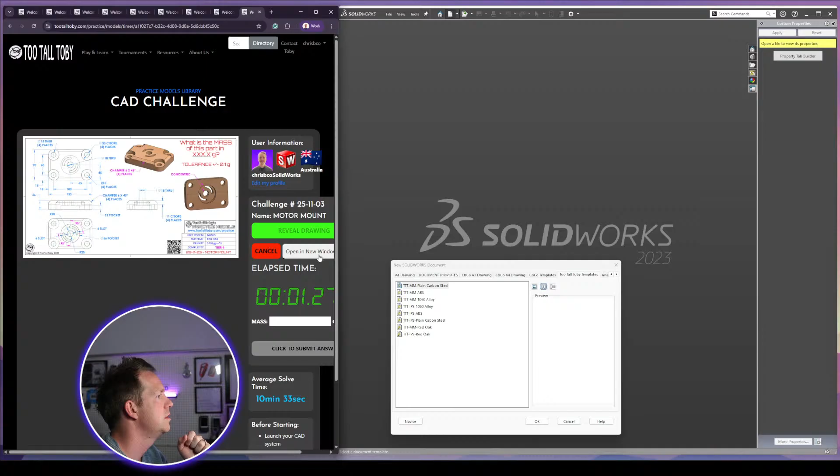All right, we'll click to begin, and I'll just have to set up my screen a little bit. All right, so here is the model. Give you a few seconds to take a screenshot if you're wanting to have a go. Red oak, millimeters, tier 4.

All right, closing that now or repositioning it. And I'll get my red oak millimeters file open. Hello, Ashishi, welcome. And let me restart the timer, and then we'll get started. Cancel, reveal, open new window, let's go.

Okay, so it's symmetric apart from that section in the middle. So as Ace has taught me, we should just do a quarter of the model. So I'm going to do half the height, which is 45, and half the width, which is 65. I'm going to do that outside radius right now. It's going to save me some time. I'm also going to put the circle in the middle, which is 18 through all.

Trim. I'm not going to trim those sections. I'm just going to extrude straight up as is. I think those are the only sketches I'm going to put in. I'm going to extrude up 26 with this contour.

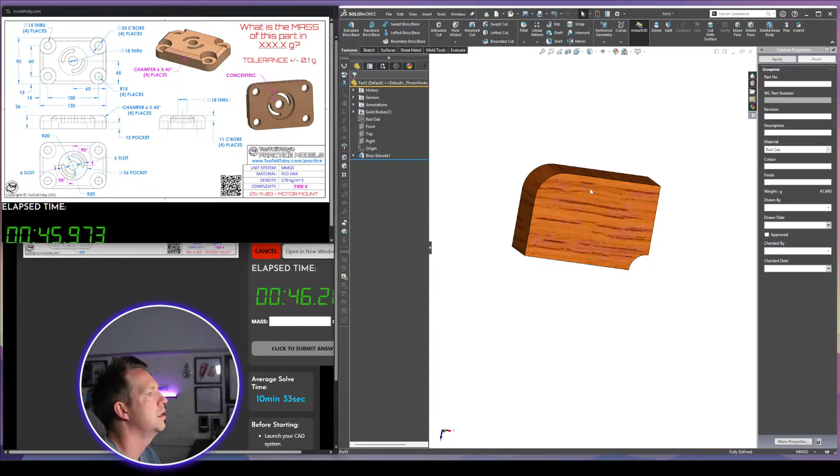I'm going to then grab on this top face a circle. I'm going to cut down, and this one I'm going to cut down. And let me just check, do I have it in the right position? Yes, it looks like. Okay, that's going to cut down to 11 millimeters.

I should have actually done this with a counterbore hole wizard, but I don't have that set up, so we'll just do it this way. It's actually a bigger circle, it's 33, so I'll have to fix that up in a second. The hole is 15, so that's going to go through all.

Let me just fix this one here. Put that dimension in, 33. Okay, and we do have the chamfer on the top. The chamfer is 6 by 45. So put that in very quickly.

2 edges. Okay, there's a hole on the bottom. That hole on the bottom is, looking for the dimension, 56. And that comes up 12 millimeters.

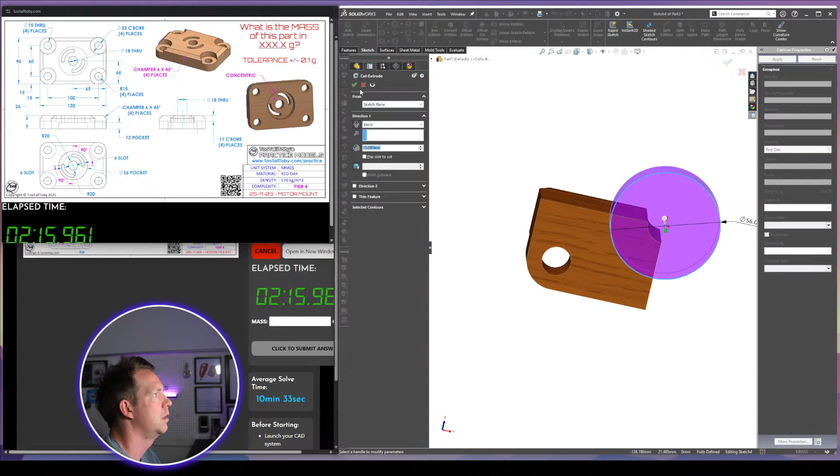All right, now it's time to pattern. So I'm going to grab the 2 faces, grab the body, merge, and then we've just got our slot on the top to do. Now this slot we can do with a 3-point arc slot or a center point arc slot, probably quicker. Center point, arc, like that.

Now I want to change the dimensions. So the center point of this is 20. The width of the slot is 6. The slot itself is 90.

If I get this to vertical, center point, doesn't want to do it. I'll put a construction line there, make that vertical for construction, and I'll do a circular pattern on this.

Cut through all. All right, and if we're done, 119.5. That's it.

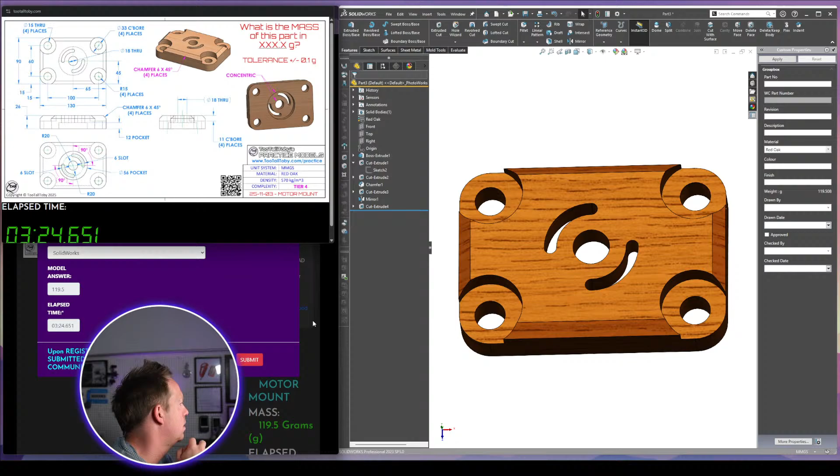I know you could do an Ivan exploit on that one. Didn't worry about it. Yeah, we could probably do a little bit quicker. I think the number of features is about right. We'll submit the time. Ace, do an Ivan exploit and do those arc slots 45 degrees in the quarter. Yeah, I guess you could do that. What would happen? Yeah, I wonder. I think it would take too long to figure out where exactly to put the slot. You know, just in case. I know sometimes it's allowed doing the Ivan exploits, but for the speed, for the more the accuracy, I'd rather do it the right way and practice that. Just think it's more likely to be beneficial in the future.

I'm just going to get a screenshot and save the file.

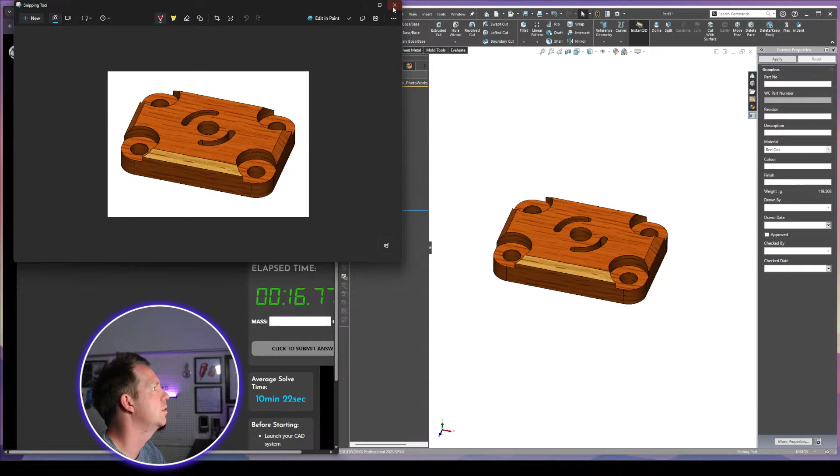I definitely like the model though. I got a little bit stuck with that hole at the start, but I did see the counterbore quickly. I think that's one way of doing it quicker.

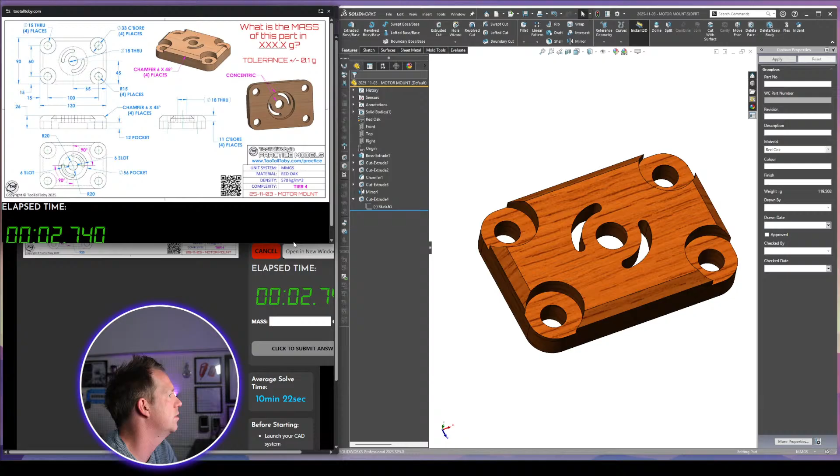I want to do a speed run of this one very quickly because I think we can do it a little bit quicker. And what that looks like is rolling back to here, putting the chamfer here. So just select one edge for the chamfer, and then on this face, doing our counterbore hole wizard,

where it is custom size 30. No, it is 15 by 33 by 11. No head clearance. Position is at the center point.

Right, so that'll be much quicker than these next two. Delete that. Delete that. This one here. Could I put that sketch in the bottom? I think so. So put that sketch in here.

56. Put that in there. I have to select an extra contour here, but it'll make this cut extrude quicker because I can just go this one, select this contour, and come up. Yep, 12.

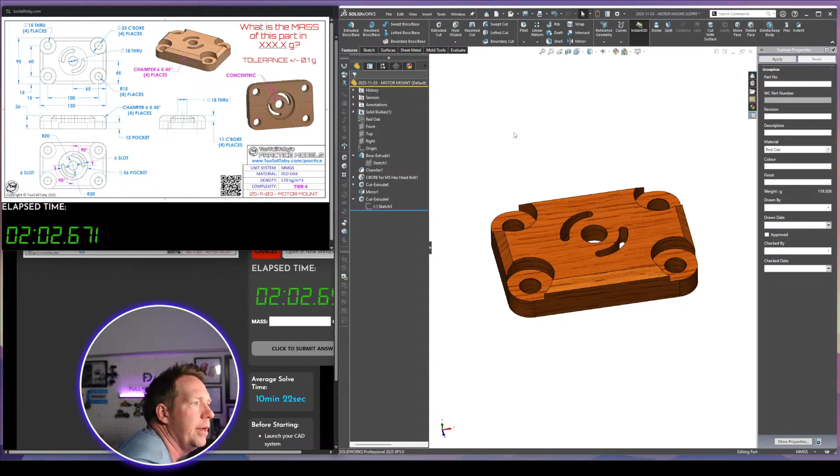Okay. Let's give it a quick go. So numbers, I'm just going to memorize some of these very quickly. 45, 65, 15, 56, 18.

They were coming up. 26, 6 chamfer, counterbore's done. Do the cut up 12, mirror, mirror, and then the slots 20 by 6 by 90. Okay. Start a new file. 119.5 is the answer we're looking for.

This will be the only one we'll do 2 runs for tonight. All right, cancel, reveal, and let's go.

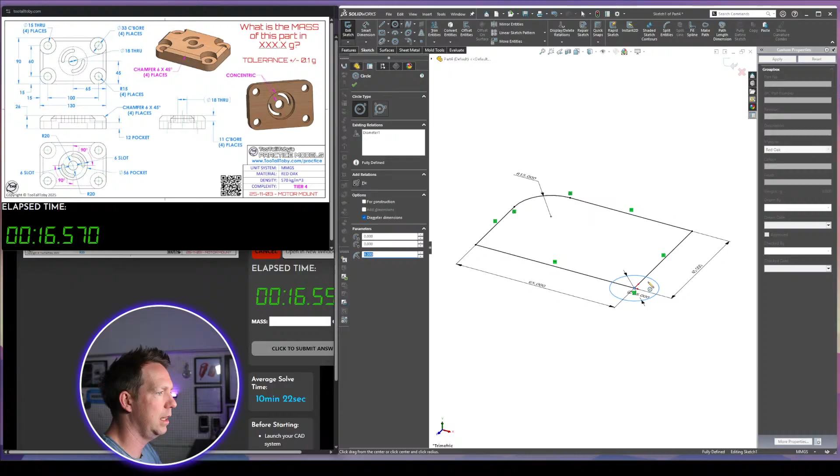Top. So going 45 by 65, radius of 15. Haven't done my 2 sketches yet. 18, 56. Now extrude. We're going up

26. It's slow on the selection. It's okay. Chamfer here of 6. Hole wizard here. Just want to get the right spot.

All the dimensions should be good. Yep. Grab this hole here. This is going to go up 12. This section.

And then we're mirror, mirror. Body. And then slot here. So we've got center point arc slot coming out 20. Out 6. We just have to get that to 90.

And we can do an Ivan exploit on this one. Just want to do 2. Cut through all. 119.5. There we go.

Did the Ivan exploit? Yes, that's a lot quicker, I'd say. Thank you.

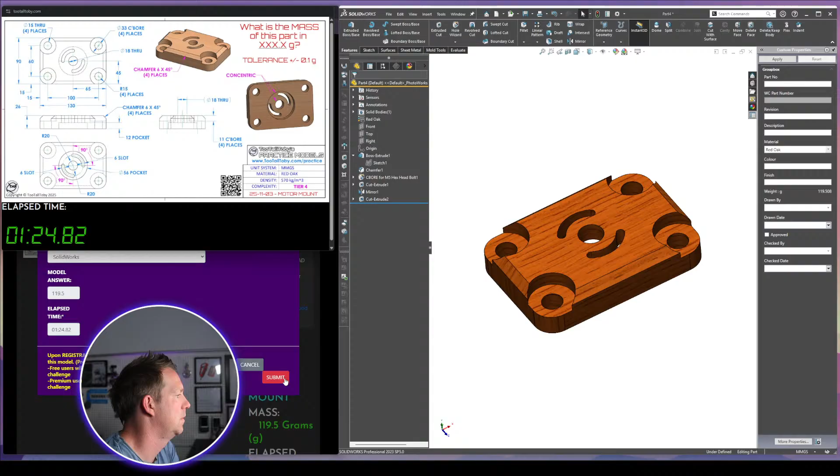Submit that one. 124. And where's that going to put us? Number 1. Sweet, all right, good warm up.

Now we can do the tier 7. Okay, that is the first one done. Tier 7 model. All right, this is going to be a big challenge. I saw this one.

I saw Adse and Ricardo do this, and they both did it in different ways. And the fill pattern is, I think, very difficult to get right.

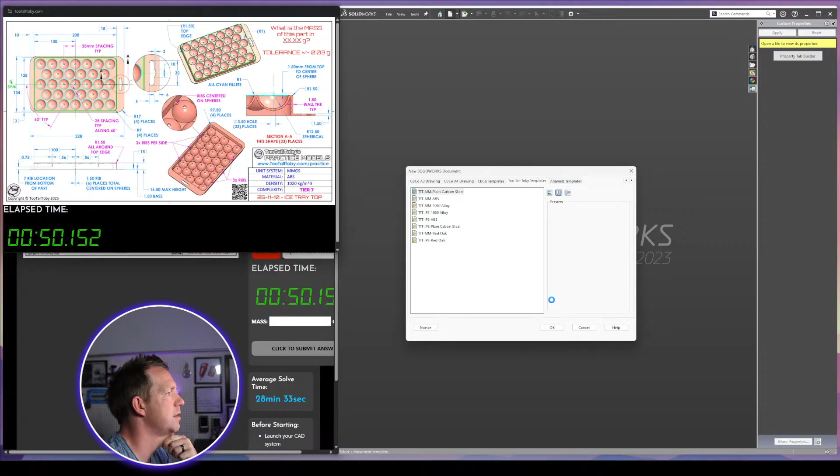So it's an ABS model, and thankfully in millimeters. Do the cut after the fill pattern. I take it you mean the hole cut, the little holes that go through them. Very complicated.

Can we do a quarter? Like, I would have looked at this immediately and gone, can we do a quarter of this? But because of the offset on one side, this 18 here, and this 10, that makes it really challenging.

And would I have done fill pattern? I think, oh, I know one of the runners did not do a fill pattern. They just did a linear feature pattern, which was smart. All right, that's ace. That sounds good.

Ribs have to go in after the shell. So the main idea with this is that we create the main body, we do all the top shapes, then we shell to remove the material underneath. As you can see, there's a 1.5 mil wall thickness, which is typical. So we want to try and work to that, cut the holes afterwards, but get those kind of dome shapes in the right spot.

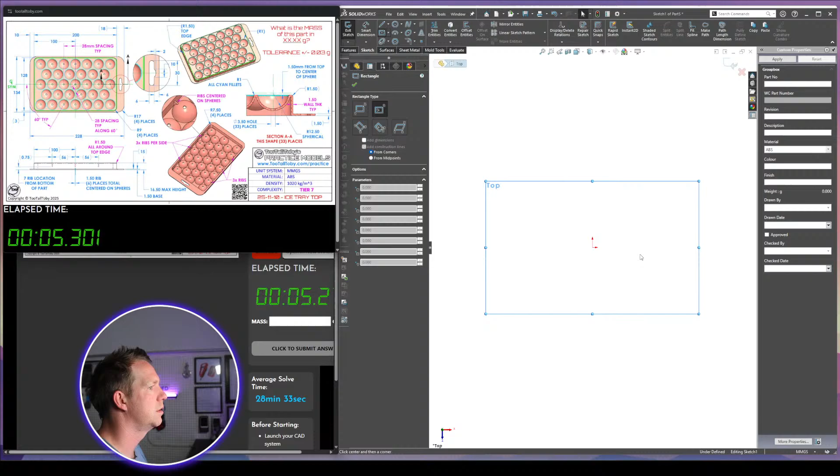Given how complicated this one is, like tier 7, I think it's a better idea to not worry about the symmetry so much and just get the whole thing right, like model the whole thing in one go. So let's do that from the top plane. And I am going to use the center point here, even though it's not the exact center point of the model. I'll explain why in a second.

I'm going to do the first shape, which is 128 times 2 by, oh no, that's the full height, sorry. 200, 128. I'm going to do this shape. And then the radius is at R9.

I'm going to do this part first. Thankfully, there's no draft on these walls. That would make it complicated. I'm just going to extrude up, get the full height. And I'm going to include the bottom, so 16.5, the max height.

And now I want to do that pattern. Now, I'm just looking for a section. So here's one way of doing it. I know that there's a lot of different ways, but we'll try this one. All right, you can see in the section view that the hole starts above.

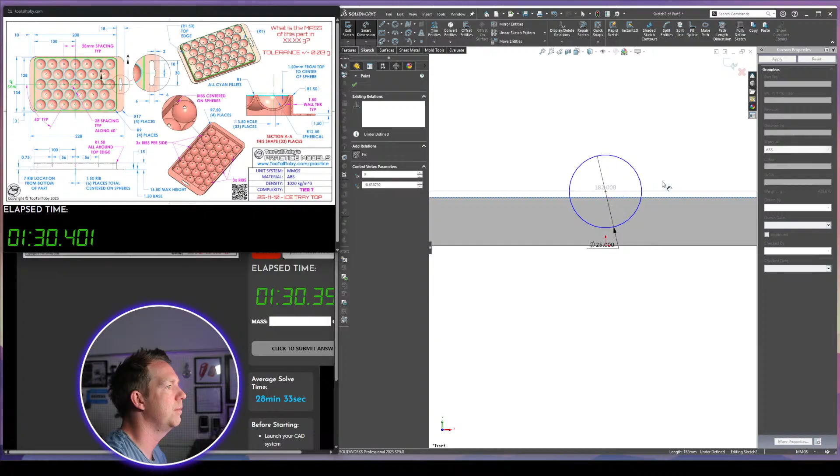All right, now the internal radius is 12.5, so we do 25. And we can also see it's 1 mil from the top, and that obviously it is in front or in line with the origin. Okay, so that's going to be vertical.

Now we put a line through this, just split it, and then we can do a revolve cut. So I'm going to select the midpoint. I'm going to uncheck thin feature, select one of the contours, and go blind. Right, so I've got the hole that I need.

Now I need to do a fill pattern with this. If we can do the spacing right, then it would work pretty quickly. So I can select this feature. Let's see if we can do a fill pattern.

Boundary is here. We need to do the spacing right, which is 28. The angle is 60, yes. And look at that, it's just done it for us.

I don't think we've had to do anything other, like change anything else. The count, 33. 1, 2, 3, 4, 5, 6, 7. 7, 7, 7 is 21, plus 6, 6 is 33. So we've got the right count. We press OK, that shape is done.

Now we can't do that little cut hole until we do the shell. So that'll come next.

Right at this point, we need some fillets, but I believe the fillets can go on after the shell. So we could do our shell.

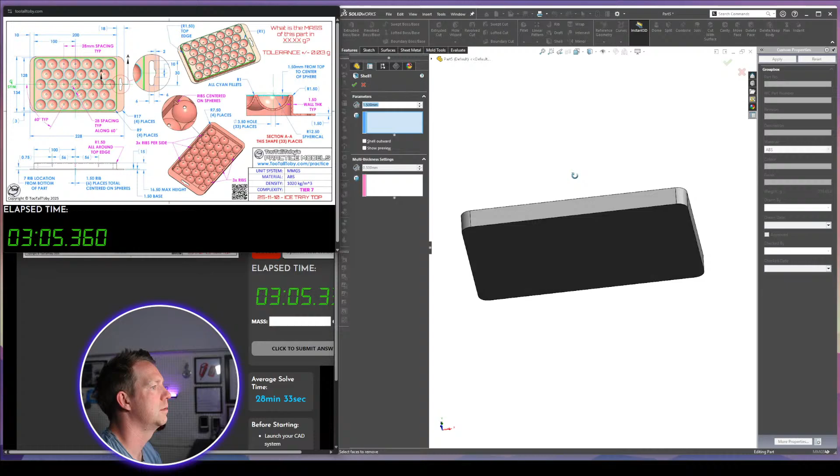1.5 for the shell. We could do our fillets, 1, which is all the top edges. I'm pretty sure there's a 1.5 on the outer edge. The way to do that is do the large radius first, the 1.5, and then do another one, which is 1. It's going to skip the edge that already has a fillet.

And then on the top, we're going to do a through-all cut. The hole size is 3.5, and we're going to go through all.

All right, can we do the same fill pattern with this one? No. Maybe. Don't think it's going to work. No.

So this is the one where it's probably better to do one of the patterns here, and then do the sketch pattern or the feature pattern. I reckon, wonder if we could do it here.

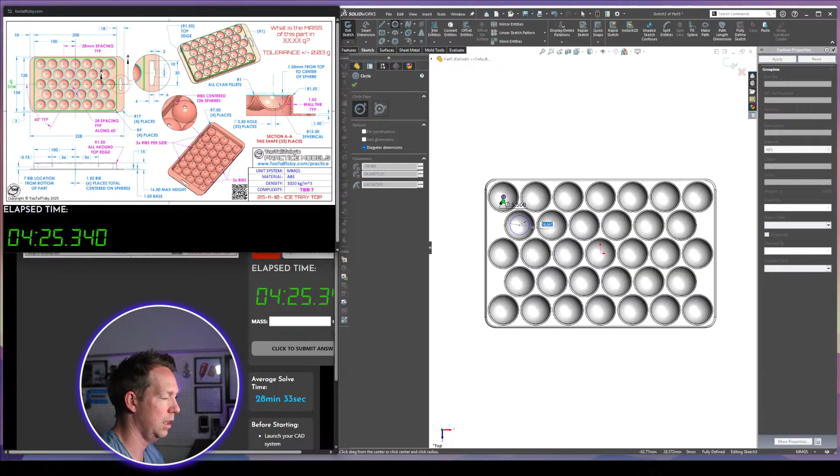In your sketch pattern, 28. It's that last one that's going to bugger things up, but we can get around that. What's the spacing this way? 28, but it's kind of on an angle. So this is the tricky one.

56. No, I'm going to uncheck that dimension. I'm going to bring that back. So that just lets me bring this to the point. And then all I have to do is this one and this one, just make them for construction. And then I'm okay, that's going to cut through all.

All right, so now I've got the hardest part out of the way, I think. So then we're back on the top plane. Now I've got to do the other shape.

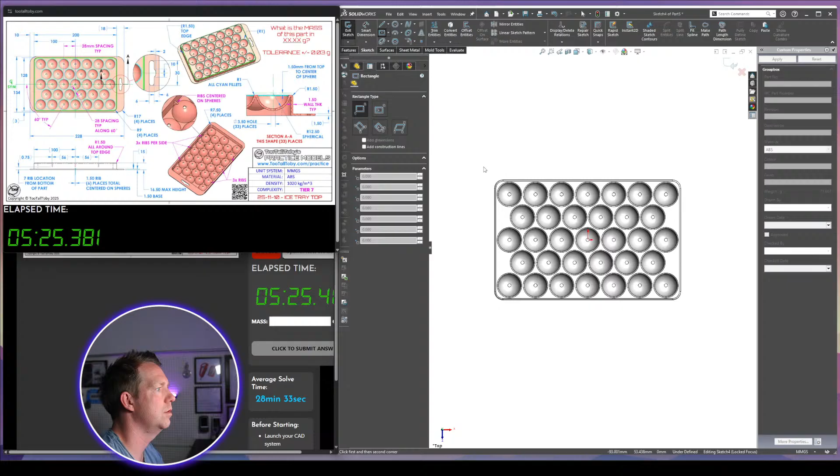So now I'm just going to do a normal rectangle, and I'm going to do the full outside, which is 134 by 228. These ones have a radius, outside radius, 17.

I'm going to grab this one, midpoint, and get that in line. And then I'm just going to get the spacing right on one side. This should be 10. And then on this side, I'm doing my slot.

So I've got a straight slot, which is -- the way it's dimensioned is not very nice -- 6 by 30, with an arc in the middle, which is 10 by 2. Put that in.

So that has a distance between those as 10, and from here to here, 2. And we just need to get that in line with the origin and then the spacing right. And the spacing is 6 from this edge. And what else is missing? This one in line with this.

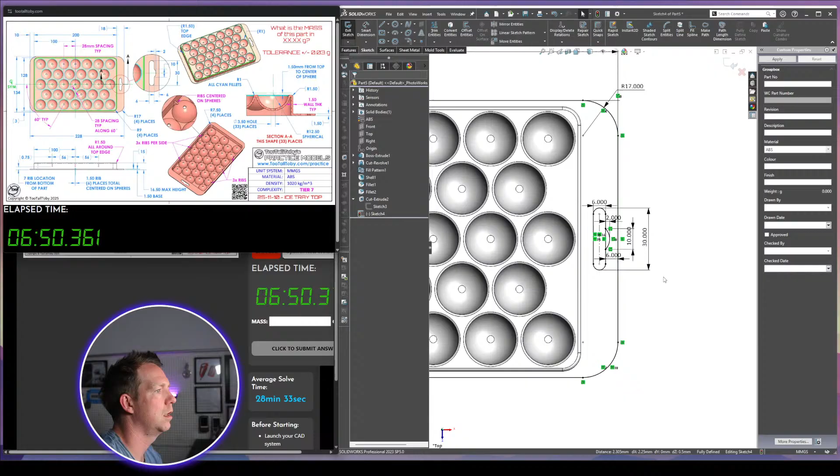Okay, so now we're going to extrude. I'm going to grab this edge, tangent, convert, extrude up 1.5, select this contour, done. And this would be the final check.

I've got to do the ribs. So rib on the bottom face. Ribs are centered, 3 ribs per side. Ribs go down 7 millimeters, 7 from the bottom, 56 by 56 spacing.

How wide are the ribs? Doesn't really say. I'm just going to put this in, and there's going to be another one that's here.

I should just do a linear pattern for this. So do 56 one way, mirror that one, mirror all 3.

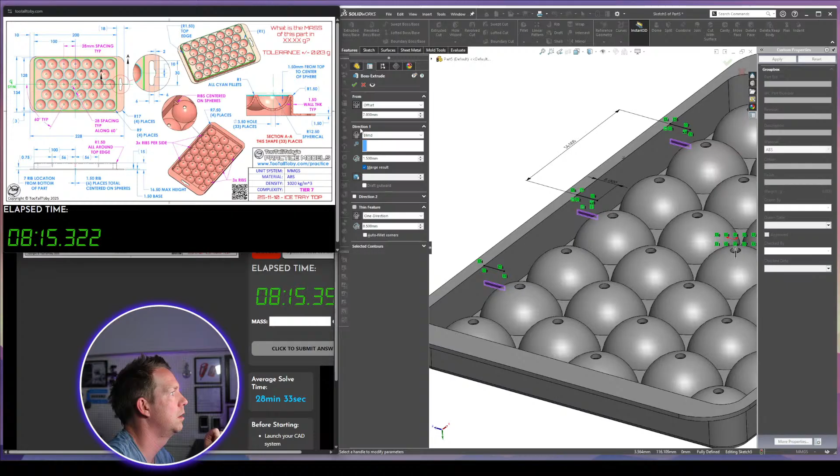Instead of using a rib feature, I would probably -- they're going to be offset from the bottom 7 millimeters. So I'm going to go offset 7. I'm going to go up to body, and the ribs are 1.5 mid-plane.

Okay, that should be it. 78.84. There we go. First time.

Not bad. What did you reckon I'd say? No move face.

Pretty smooth workflow. Little mistake on trying to do the holes with a fill pattern, but otherwise good.

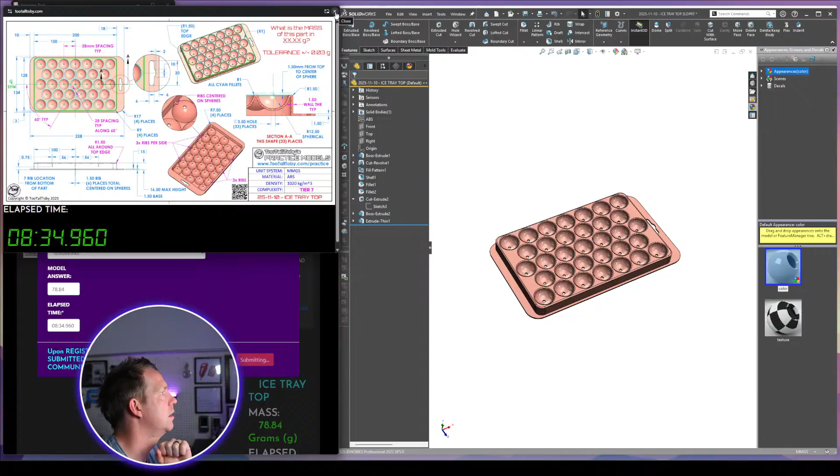I wonder if there's been any quicker than that. We will find out. Submit. Average time 28 minutes. Yeah, it's pretty hard.

That was a lot of fun. Good suggestion, okay the poll is open. No one else is voting. If you can see the poll, here 4, 5, or 6 models remain that we can do. But this was a fun tutorial.

Edward, I'm not sure if you've seen much of Toby's practice models, but we're going through a couple of them tonight. Let me just do the next one on the list. I'm just going to grab on here and bring it forward. We will do a tier 5 machine part.

End the poll, okay. So let's open it up and have a look. Anyone wanting to have a go, grab a screenshot while I've got it open.

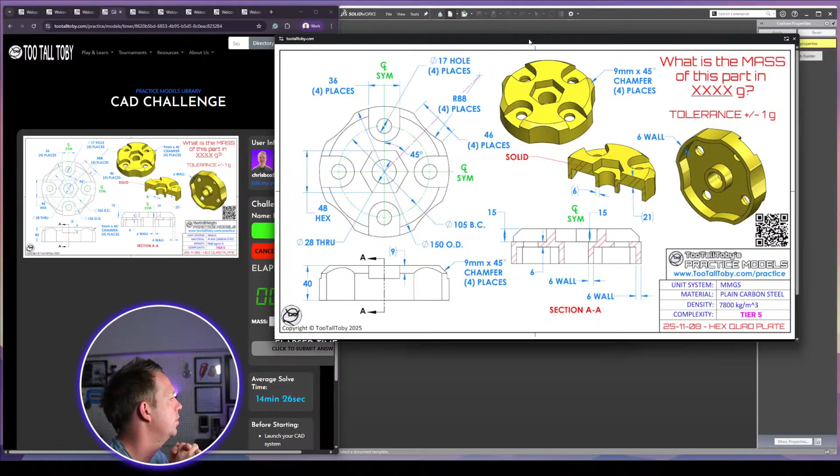Tier 5 millimeters, a lot of symmetry. There'll be a few quick ways of doing this. All right, and it is a plain carbon steel part. So I'm going to select plain carbon steel, open, then reset my timer and start again. Okay, cancel, and 3, 2, 1, let's go.

Now, couple of cuts also revolve. Let's just do what we can to keep it simple. So the outer diameter is 150. There's a hole in the middle which is 28.

We can do - let's draw a slot as well. Slot is 36 with a hole inside it, which is 17. And the slots are 105 from the middle.

Okay, and then there's a hex, we'll put the hex in too. So this is one where we'll just put a lot of stuff in the first sketch. Just looking for the size of the hex - it's 15 by what? Annoying, can't see it. 48. Okay, 48, and horizontal. Okay, let's go.

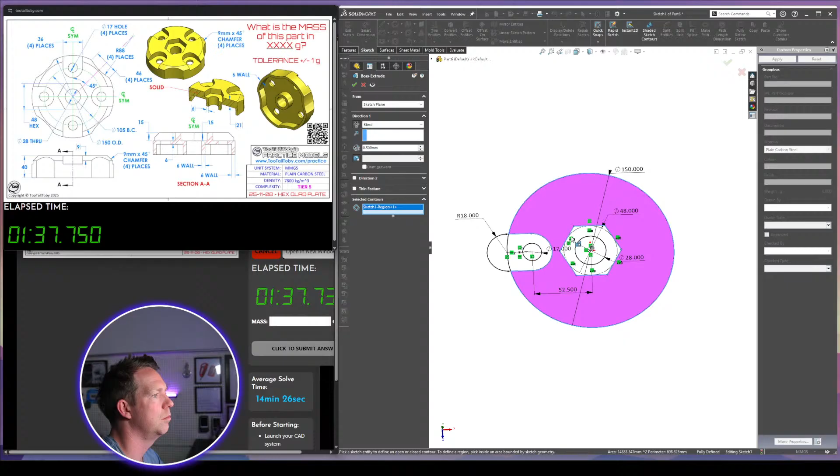So first up, main body up the middle. We're going to go up full height, which is 40. Include this one here. Okay, then we're going to do a chamfer on the outside, 9 by 45.

Okay, and then we're going to do our cut, which is 15 from the top. So I'm going to use that slot sketch here. I'm going to go from this face and go blind 15.

All right, and I'm going to cut. I'm also going to do the other cut, which I didn't put in the sketch, which I probably should have - which is the 88, R88. And where is the center point of that? How do we work that out? That cuts, it's on a 45-degree angle.

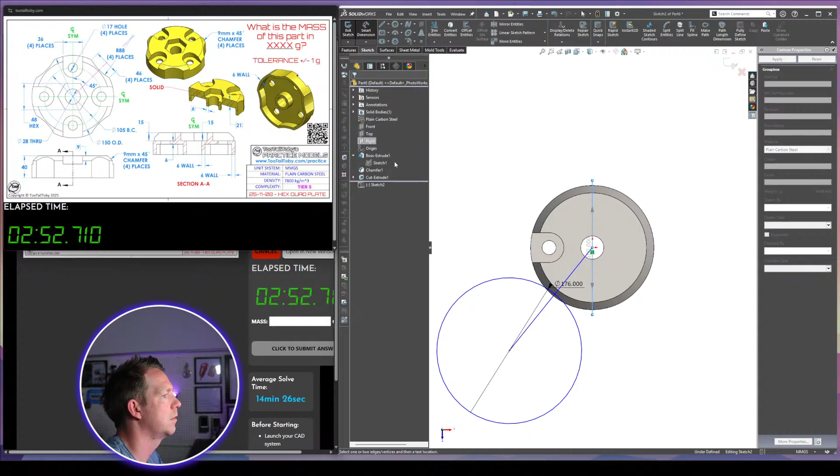And the way it cuts through the shape, there is a line which will be perpendicular to this one, which will be 46. And that's going to cut onto this edge, this edge. So we can make that construction, cut through all.

All right, now pattern - so I get these two, do a circular pattern. We can have 4 of those. And you can see an issue there. Just going to hack it quickly, get those and do a through-all cut.

On the underside then, 6mm wall. Let's try that now. How's that going to go? Not great because it's going up too high. It should be going up to that face, which means we want it to be 21 thick from the top. Let's see if that works.

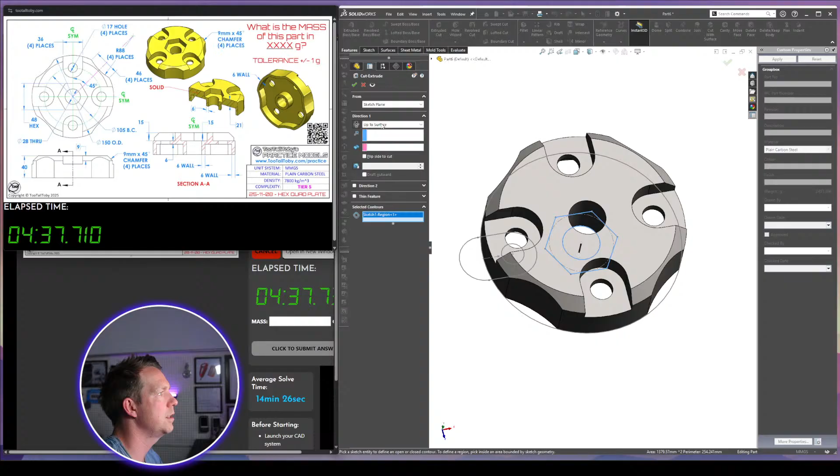That looks better. And then we want to get all of these faces, get rid of those. Bit of extra mucking around, but I think we're there. We just need that hex on the top - that hex depth is 15. Grab that shape, go from this one down 15. That should be good.

2289, within tolerance - it's 2290. Oh, definitely a few ways to do that quicker, but tier 5, it's still tricky. Not too bad, not too bad. Definitely a few ways you can do it quicker, but I'm reasonably happy with that. Let's save it.

Edward, thanks for the question. Always capture the whole dimensions of the model before drawing. Just start with basic dimensions, figure out other dimensions along the way. It depends on the model - I'll explain more in a second. So if it's a really simple model with just a couple of dimensions, maybe you would just put those dimensions in and keep going. You just do them all into one sketch.

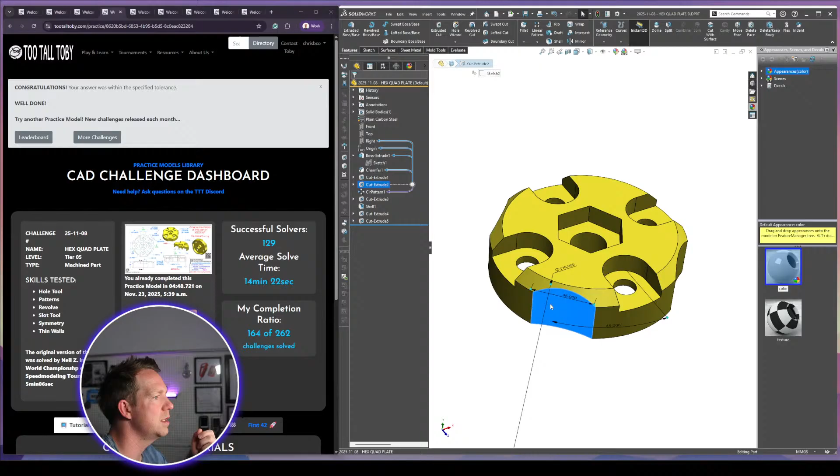But if it's more complicated, it takes a bit of planning out to work out what you're going to put in the first sketch. You think about the features that you're going to create after you've done the first one. So like in this example here, I put a few things in this first sketch and the idea was I'm going to use them again. I definitely should have put this one in that sketch as well - that would have saved me some time.

From a speed modeling point of view, I'm focused on that today. I'm trying to work out what's the most efficient way to get each of these sketches or each of these details into the model - least number of clicks. So whatever is the least number of clicks, that's the solution.

There's a few ways we could do this quicker, but that was not too bad. Top 100, a few very quick guys in there. I'm not even in the top 15. Just speed runs, I think this must be a featured model, so there's a few guys that have had a go as well. Good to see.

But tournament model Tier 6, sheet metal, I suppose that's what you can expect. So grab a screenshot if you wanted to have a go with me.

Tier 6 sheet metal, aluminium alloy, millimeters, wall thickness of 7, bend radius of 9. It's symmetric. There's a couple of different fillets and radiuses, which are highlighted with the pink and purple. So R10 in 6 places, and then there's an R20 I can see, a couple of R20s, so R10s and R20s.

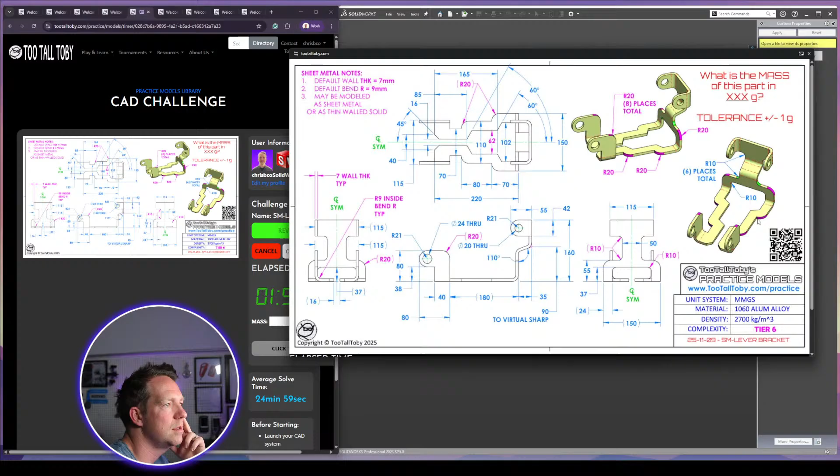Right now, I'm trying to formulate a plan. I'm trying to work out whether I start with this end here or this end here. Kind of want to start with this bend and do half of that. So start from like this bend section here, come down, and then do this as an edge flange.

Can't remember how these guys built it. But if you look at the detail quickly, there might be a few ways where you could sketch a shape and then cut a hole out afterwards, which would speed things up. And the fillets as well.

All right, let's get ready. Give it a go. Aluminium alloy, millimeters. All right, I'm going to restart the timer. And here we go. Let's start with this side view that we can see.

So I'll use that as the origin. I'll put the origin on the inside. Now I'm doing this because it's got the angled section there, which I think makes it even trickier. And I just want to get that bit right. 35.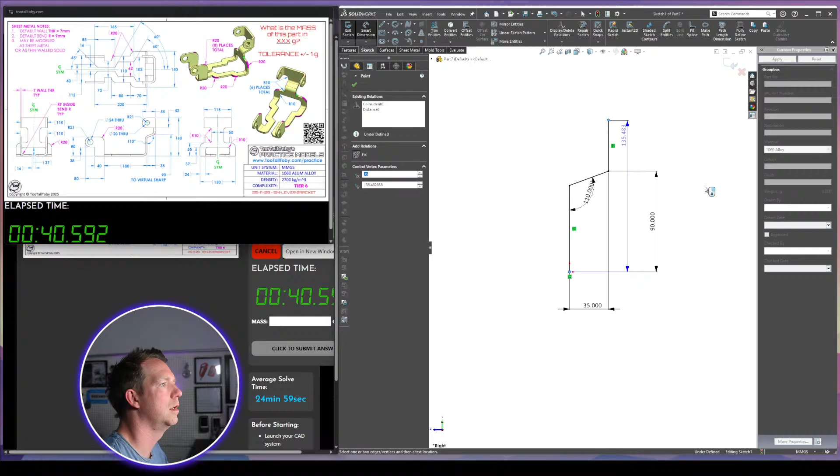Now I've got a 90 to a virtual sharp. I wonder if I'm going to be able to use that. I've also got this angle. And I've got the total height. Right, so that's my first element.

Now I'm going to get the setup right. So the distance for this is going to be the outside width of that section, which is the 115, divided by 2, because I'm going to do half. The thickness is 7, the bend radius is 9. Got to make sure I've got it on the right side, so reversing direction. And then OK, and then we're away.

So next bit, there is a small edge flange here. Now most of the edge flanges look to be bend outside. But because I've done the 115, I kind of need to bring that back. The width of that middle section that comes up is 90. So I might actually bring that back. But while I'm on this edge flange, I'm going to put this dimension in.

This one is 55. Right, I want to capture that. It's also not full height, so I'm going to edit the bend flange sketch and put a dimension in there to make that 42. And I could also put in the radius here, 21. It's not going to like it though, so I'm not going to do that.

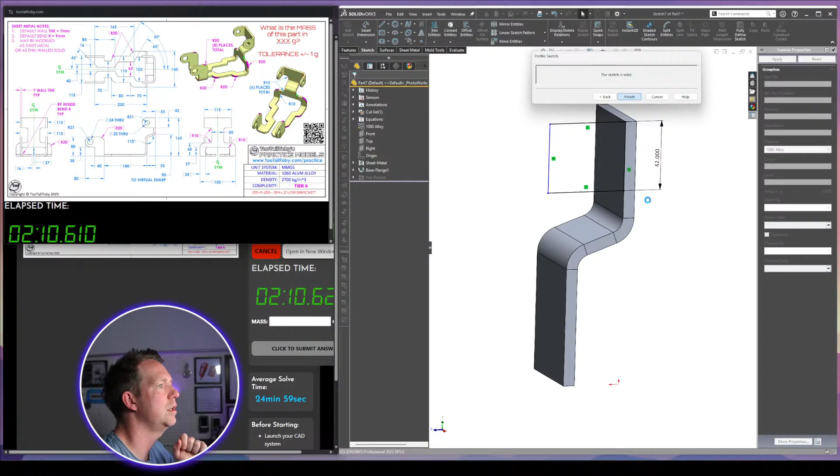I'm going to finish, put this back to 45. What's the number of this here? Then 61, it's too far. It needs to be 115 divided by 2. What is that? 57.5.

57.5, 3.5 less. This is 90, all right, so what's going on there? It needs to be bigger. Oh, 50, I've completely read that wrong. So it should be 25.

Then this one needs to be offset. 41 needs to be 57.5, 16.5 for the offset. Right, so I can edit this feature here, put in offset. Is this going to be right? I think so, okay, that's looking better.

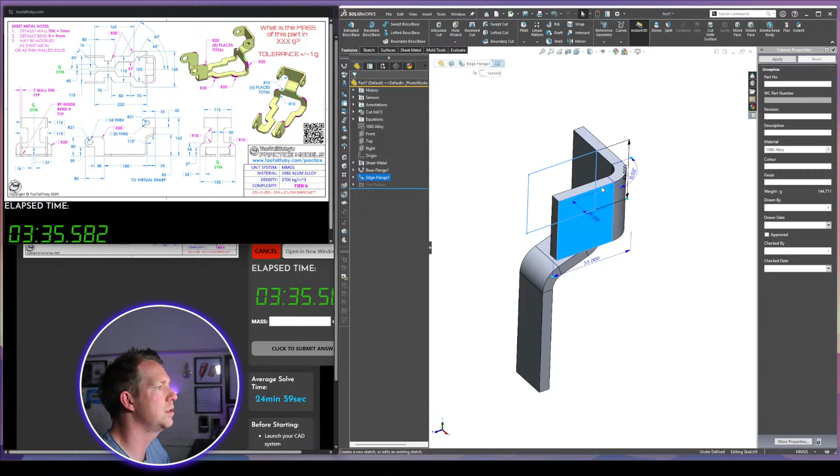Now we can do, better just do this with a cut, and could probably do this in the last stage as well. So I'll come back to that and do that after.

I can see why this is getting very complicated already. I need to do more on this one. This is going to take me a bit of back and forth. I can see that already.

Incredibly challenging to do live. Well done, I'd say. Yeah, great. It was a great one to do because I've got a cut here.

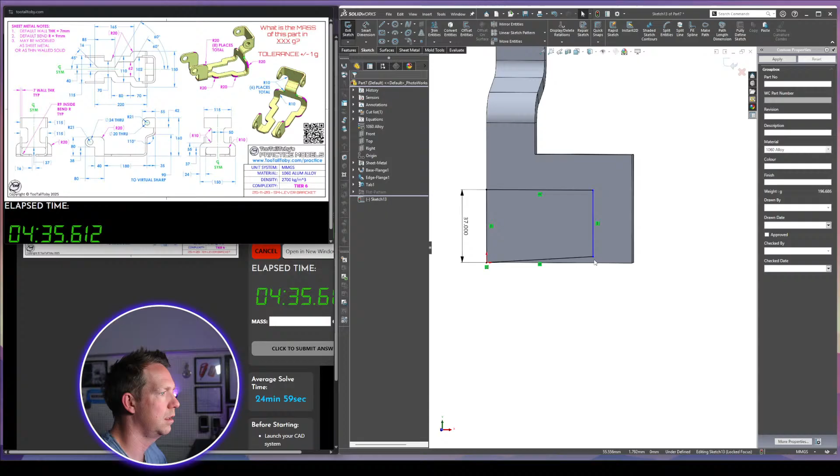So the cut is 24 by 37. 37, 24. Go on there. With an R10, I'll put that in. Cut that into thickness. Okay, that's looking better.

This one here is a 10. This one here is a 20. Okay, the rest of that looks all right. I need another 10 on this one.

Okay, so we've got that first section done. Now we can do a large edge flange here. And I don't want to offset this one, I want that to be within. And if I can do the full length here from this section to the end, then I'll be good. Which means I want to go 100 and 220. I want to go 220.

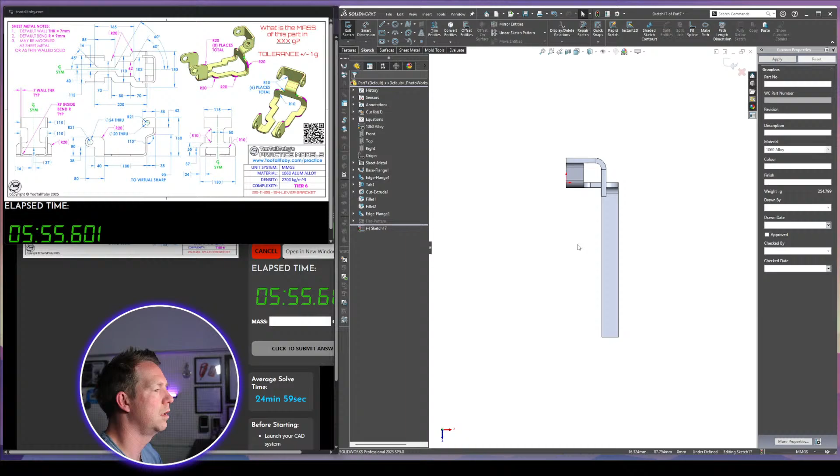And that's just setting up my next sketch. Because now I'm here and I can work on this view. I'm just going to change this so I'm matching the drawing. And now

Let's put it in. So coming up here, chamfer across, angle down, across, angle down, across, down, across, down. That should be it. Cross down, cross down. Yep, like that. Now we can do some dimensions.

So what's the gap in between, 16? So from here to here, it's going to be 8. So as we start to fully define this, it's going to start to take shape.

Right now I'm just looking at the dimensions as much as I can to make sure I'm hitting the right points.

Probably useful if I actually show this right plane. So I've got something there to dimension to.

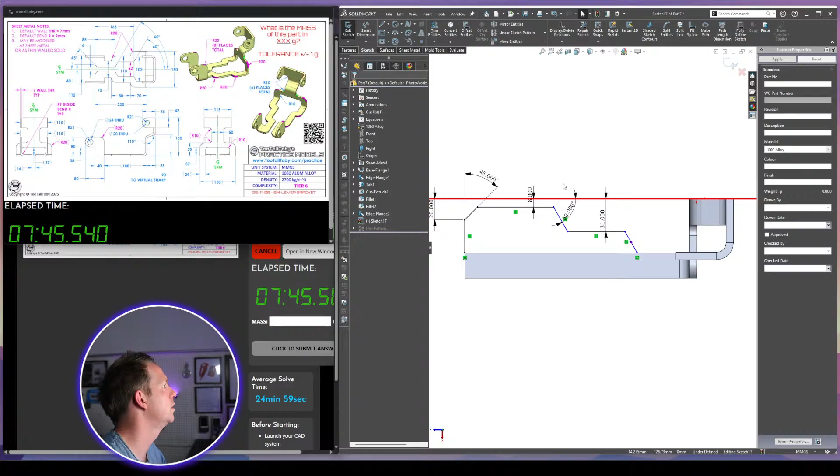We've got 85 here to the end. And then for the next one, where does this point go? 165.

So I'm going to put that shape in. I can come back and cut the next one after, because this next one has then a cut, which is here. Just trying to find the distance of that.

Might not be able to. Looks like it is 150 from here. It is 35 from here.

Does that look right? Not sure. No, I think it does actually.

I think I also need to cut more off here, like this. So I'm going to cut that because the width of that section there is 115. That's this one.

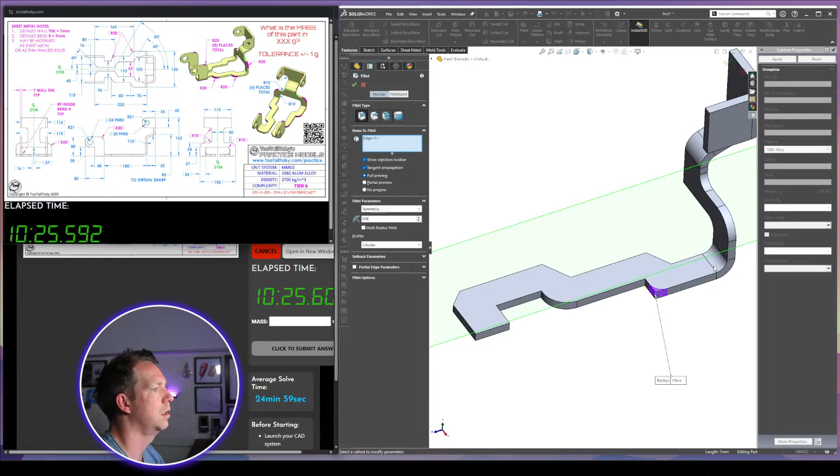Good. Let's just roll this fillet down. Can't do it. I'm going to put another fillet on here. 20. Okay.

That's all looking okay. Let's do our edge flange up. Height of this one is 80, so that's including that.

And then we've got a, is that right? Yeah, that's okay. Then we've got here a little section that comes off the side. We just have to get the details right.

We're getting pretty close on this one. There'll be another question if we've got all our dimensions right, but so far feeling okay about it.

Now we've got to finish, get rid of that, finish off our edges. Make sure we've got all our radiuses in.

Oh, I was supposed to do that cut at the same time. That was annoying. Okay, that's 20 and 42.

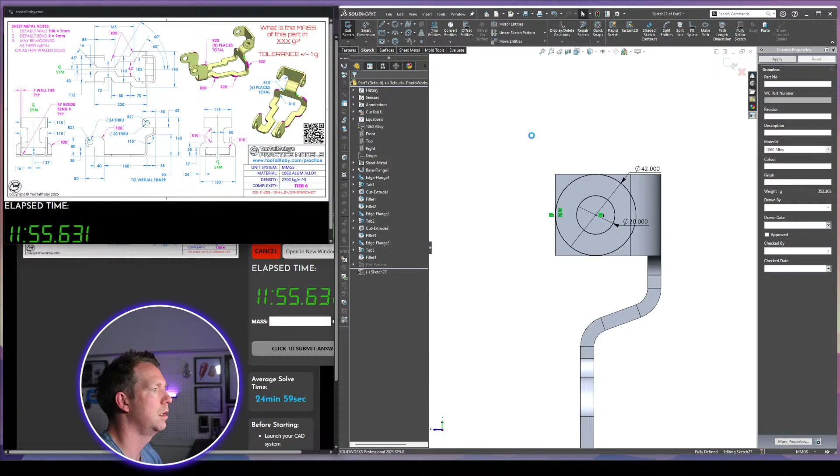Let's midpoint this one and get that tangent. Then I'm going to cut selected contours because I want to cut that, and that through.

All right. At this point, I want to save. Too much to lose.

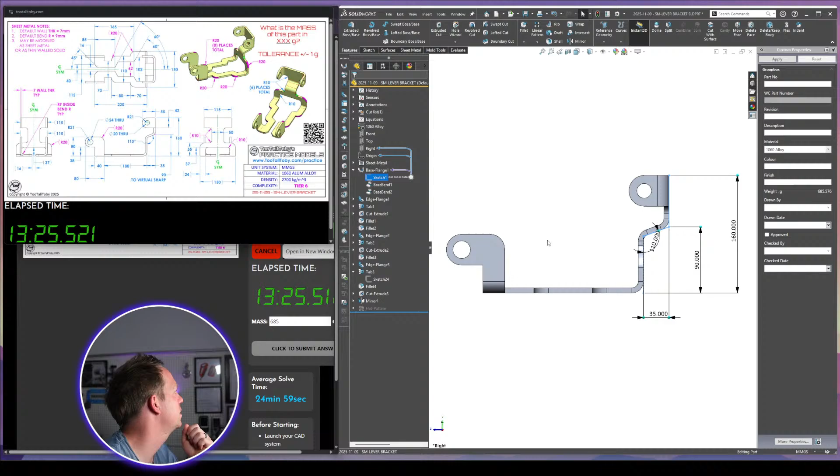90 to the virtual sharp, 110. So what I'm trying to do now is just identify and mark off sections of the drawing where something's gone wrong, something I've missed.

Let's have a look from this view. This looks pretty good.

Top view. Slot in the middle looks a bit big. It says 16. It's fine. This cut looks a bit wide, I'm not really sure about that one. So this one here, or this cut here, 150.

Hey Vivek, welcome. Trying to troubleshoot this model right now. Very complicated to build, and we're just trying to spot where I've made a mistake.

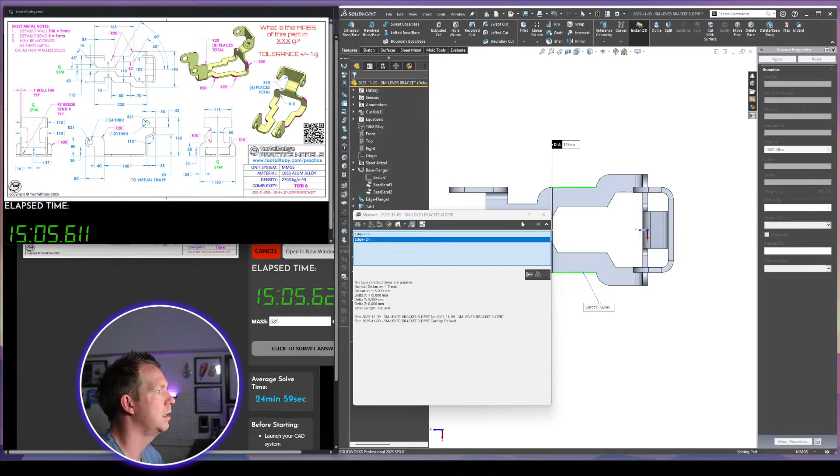I reckon it's to do with this R20 at the top, this section that doesn't quite look right. I can see that this should be 150, that's good. This one should be 115, that's good. This section here should be 110, and that's 115. So that's a mistake.

So where is that mistake made? That's here, 110. So this one means this should be 55. Means this doesn't work. And then I lose the dimension, which was 150. So that's from here to here, 150.

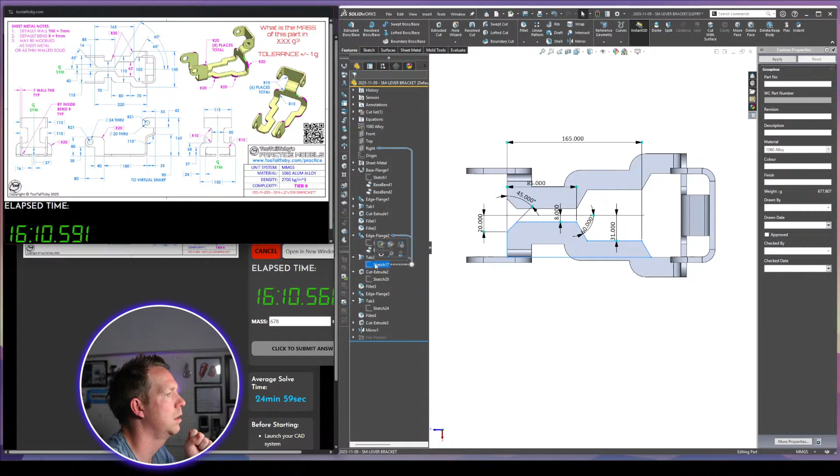All right, let's see if this is better. 6, 7, 8. Still wrong, okay. Sketch tab there. That's still, no, that's 110. That's okay.

Oh boy, really very good one. Well, we just got to work through it. Do I go to the drawing? I'm pretty close to doing that. There's so many dimensions on this that it makes it difficult without marking them off one by one to know exactly where you've gone wrong. So let me do that, which means I'm actually going to bring this across here.

So this is the process to go through: stuck on a practice model, not sure where you've gone wrong, I encourage you to take a screenshot. You can't do this just on the app. You have to bring open your screenshot, and then I'm going to go through these one by one and mark off the dimensions until I know that I've covered everything.

I'm just going to do a red pen like this, through the dimensions, and this is going to tell me what number I'm missing, what number I've got wrong at some point. This is my 50. All right, and then I can roll down to the next one, and I can see this is the 16.5. So that rolls on there, 90. It is 42 high, which is this, 55 long.

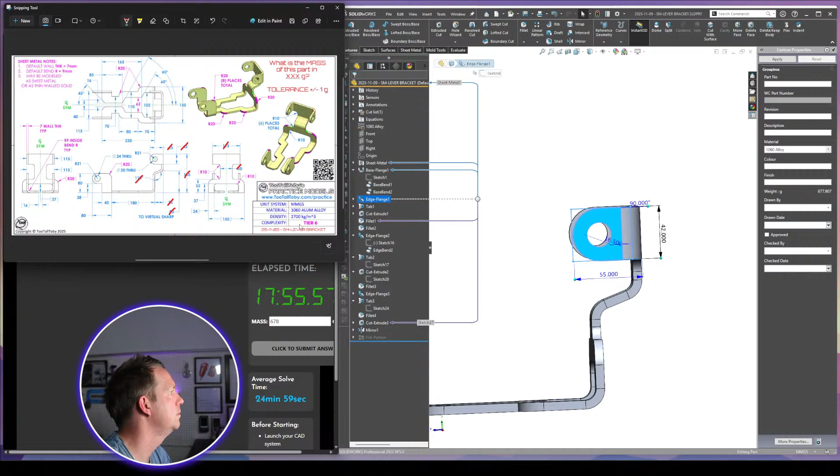All right, and then my tab section here, 55 high. The 55 refers to this, and the width 75 refers to the 150 that's here. Okay, that then has a cut through it, which is 37, 24, with a 10 mil radius there. I've then done these internal fillets, R10, and I've done this external fillet, R20, is that one, and then an edge flange here, which is 220.

Now the 220 is what I've done going from the outside. That's this one here. And then my tab is filling in the gap.

So this has a few dimensions. I have the 20 for the chamfer. I have the 85 going from point to point. I have the gap of 8, which is the 16 through the middle. I have the 60-degree angle, that's for both, I've made them parallel. And then I have the 31, which is the 62 note right there.

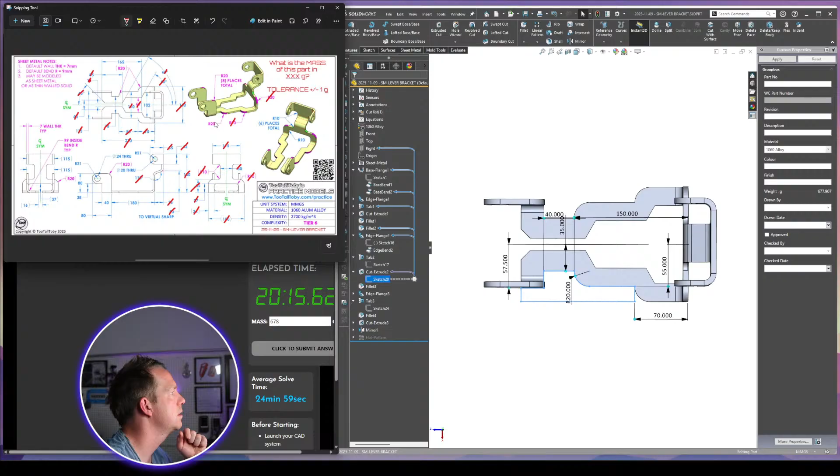Then I've put a couple of radiuses on. I've done the outside edge here, which is R20. I also did this R20. The link tree structure, yep. If you right click here, you can click on Dynamic Reference Visualization for Parent and Child.

All right, edge flange at the top. So this is the last bit. Got 80 there. I didn't actually measure this, but I assume this is 38. Yep, that's fine, 38's good. The hole then, I've got my R21, got my 24 through all.

And then on this side, I've got that radius as well, 20. On this side, I've got the 42. I've got, which is this 21. I've got 20 that's through all, and then I've mirrored.

All right, so it kind of looks like I should have all the dimensions correct. There's a few, and I've just found one here that's wrong, and that's a big one that's wrong. 40. That should be 30.

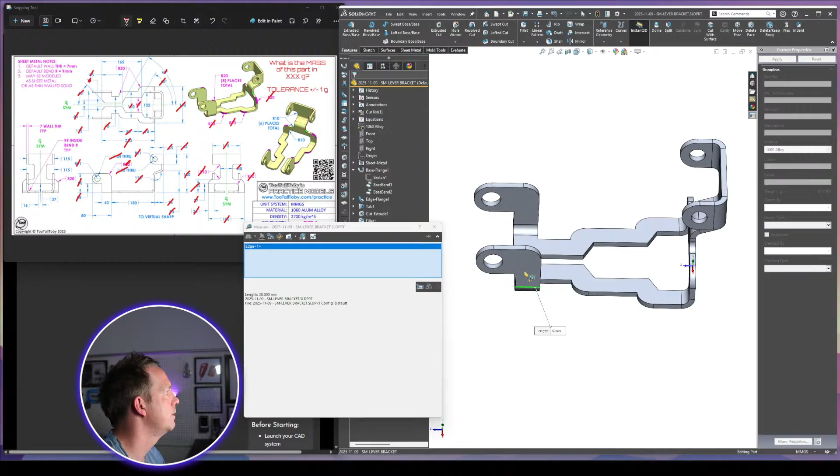So how does that work out? Because this should be 180, when I've got it as 190. So I've made a big blunder in what looks like this edge flange, even though I was using the 220 number.

I think it was on this cut where I put this 40 dimension in wrong. So if I bring that back to 30, you see how it moves that top shape? My weight goes to 696.

And we found the answer. Took some troubleshooting, but yeah, it was when I put in this gap here, I had a bit of trouble with it.

Good tutorial, good lesson to learn from on this. Very, very difficult model. Well done to the guys that did this live. Fantastic.

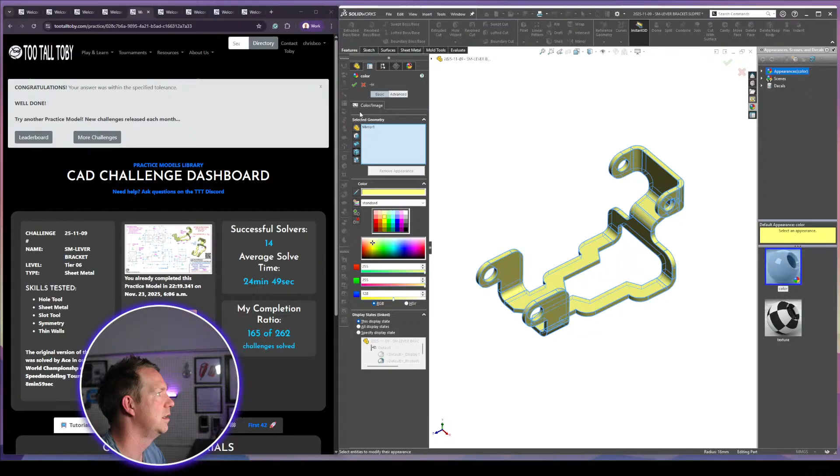Ace did it in 9 minutes. Yeah, brilliant. Definitely not a sheet metal specialist myself. Let's just color it and then move on to the next one. Ace, if you're still around, well done for getting that one done in the competition, man. That was awesome.

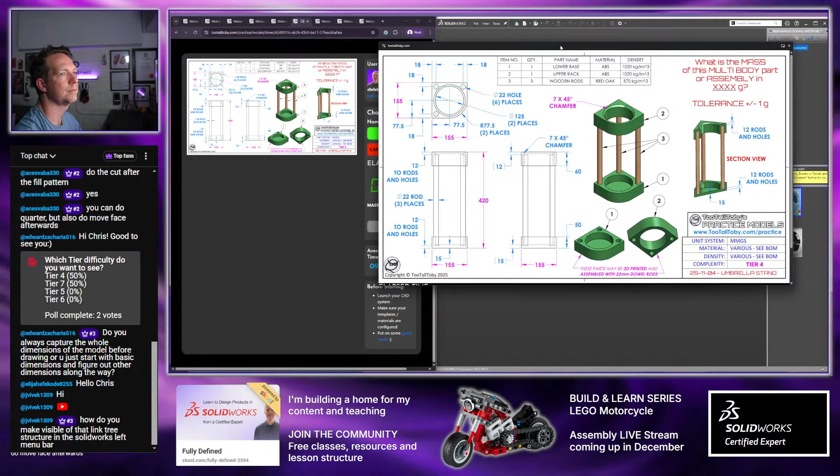Okay, here it is. Let me open up the drawing. Take a screenshot of that if you want to have a go.

It's tier 4 multi-body. So the multi-body ones have a combination of materials. You can use any template in the right units of measurement, and you want to apply the materials when you've completed the model before submitting your answer.

All right, let's go. Multi-body is generally one of my strengths for these kind of models, speed models. We'll start our file in ABS, and then I'll restart the timer.

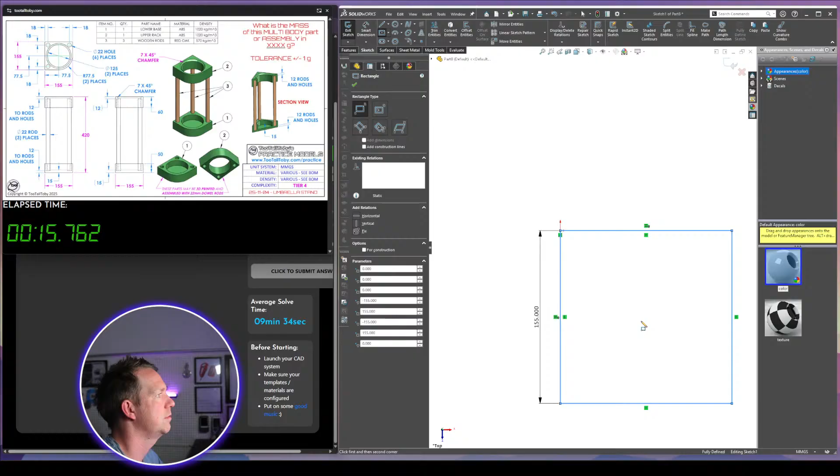Okay, let's go. All right, I would start straight away with the bottom section. And let's use the back corner as our origin and do the full size, 155 by 155. We want to get the hole through the middle, which is 125.

Doing mid-plane on these two works in this one because we're not going to change the radius on those. I'm only going to change the radius on this front corner. And then I'm going to put in these holes, which is 22. I'm going to dimension one of them.

And I'm going to pattern it around this one. Go OK, I'll just get that there and make this one for construction. I'm not going to need that. And that should be the only sketch that I need for the whole model, I think.

So then here, now we're going to do the bottom section. Bottom section is 50. We're going blind. It is solid on the very bottom for what looks like 15 millimeters. Yep.

So we can just sketch it like this. And then I'm going to do the same again, but this time I'm going to select those contours being those holes. 1, 2, 3, 4. Okay, so that fills them in. It doesn't say anything about clearance in the holes.

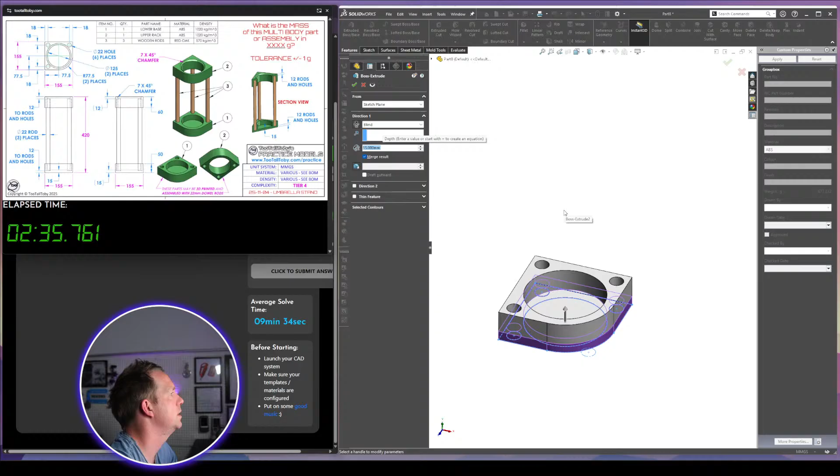We're going to offset the distance. We're offsetting it the full 420. And then I'm going to change the direction. And this one,

do a very similar thing. It's going to go 12. I'm going to select contours, just going to get those 3. I'm going to go from this face and come down to merge. Right, this one's going to have a 45, 7mm chamfer.

And then we need to do our rods. Our rods, we're going to go select contours. 1, 2, 3. They're going to start from this face. They're going to go up to this face, unmerge,

and there's our bodies. Let's add some materials. These 2 are going to be the ABS. These 3 are going to be the red oak.

If all our detail is correct, that will be it for the model. The answer being 1509. There we go. Not too bad.

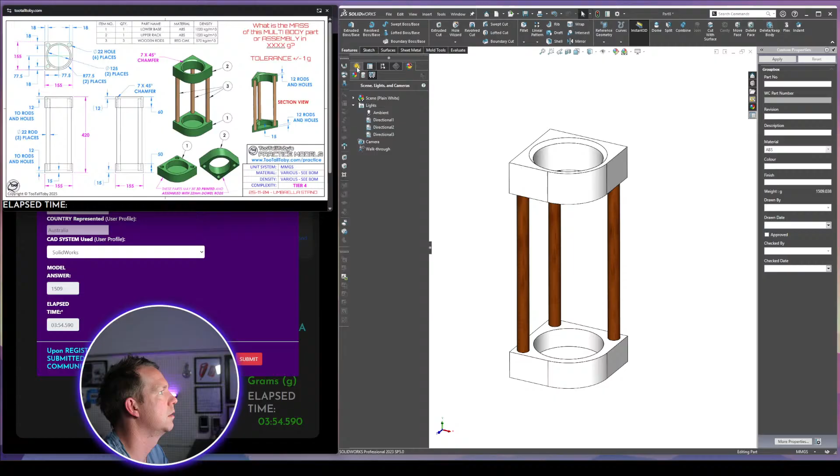Let's grab some materials on these 2 parts, some appearances, save our image. Very good, fun little tier 4 multi-body option.

Submit that one. That was pretty quick, reasonably happy with that.

All right, the next model is also multi-body. We'll come back to that a bit later. Or maybe that might be our last one. Let's do another machined part, tier 5.

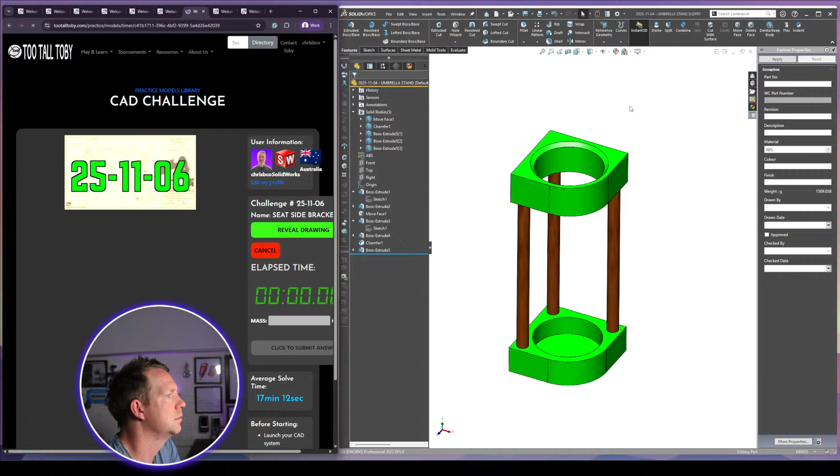Here is the drawing for anyone wanting to have a go. Not a symmetrical part, quite tricky geometry, potentially tricky to get your head around. Sketching from a few different planes, using some shapes that aren't regularly seen in the models, tight tolerance. This will be fun. Plain carbon steel, millimeters.

I'll start that file up and we'll start the timer again. All right, in 3, 2, 1. Let's go. So I'm going to start with this side view. I think it's going to make things easier to do. So I'm going to put that there, come all the way across.

Actually, don't have a dimension for this. Might not be easier. We will find out. I want to get that shape done.

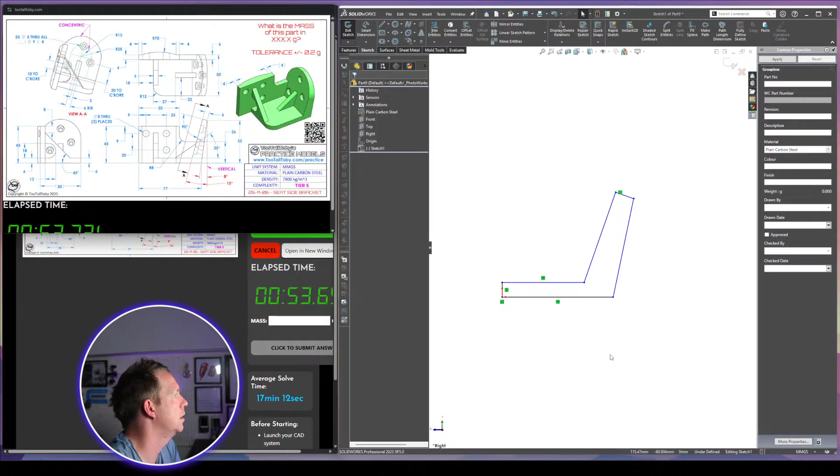And then that is perpendicular. This one is not perpendicular. No, there is a rib there too. So it is 8 degrees off vertical at the back and 15 at the front.

And we have a 52 on the side, 6 on the top. And the 77 we've got all the way to the end. I'll just put the rest of that sketch in.

This will help. I didn't plan on doing that originally, but I think with the way the dimensions are, it'll make things a bit quicker.

Let's move that all over there, put this one down. So what's the height of that section? 6. And what else do we have? 26 to that.

And I put my origin on this point here, and that point is 18 from the end. This one here is 18. Okay, so this section is fully defined.

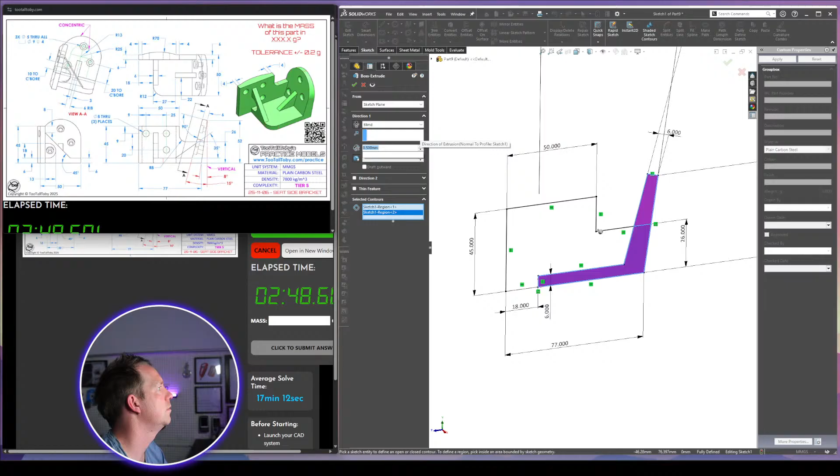And it's got a R25 fillet. I'm going to put that full round on. Get that shape done.

And then I know on this side, I can extrude here, select these 2 contours. Not quite. The distance of this is 6, and that's going to come from this face. Anything sticking out? No, that looks okay. R8 here.

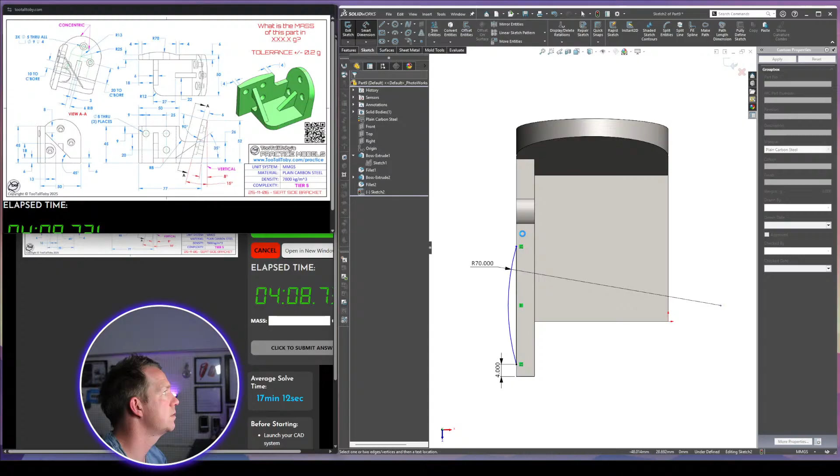All right, now it's just a matter of completing the detail from here. We've got the basic shape done. I just need to be accurate with everything else. The rest of the sections are reasonably straightforward. You just need to break them apart into their separate elements and follow through and get all the detail.

So make sure you're not missing anything in this part, which means looking at the shapes, working out what's there, what's not there. Like this one has a bit of a D-shaped cut, for instance. So being able to read that, see that on the drawing where it is, which is over here, and then put that in.

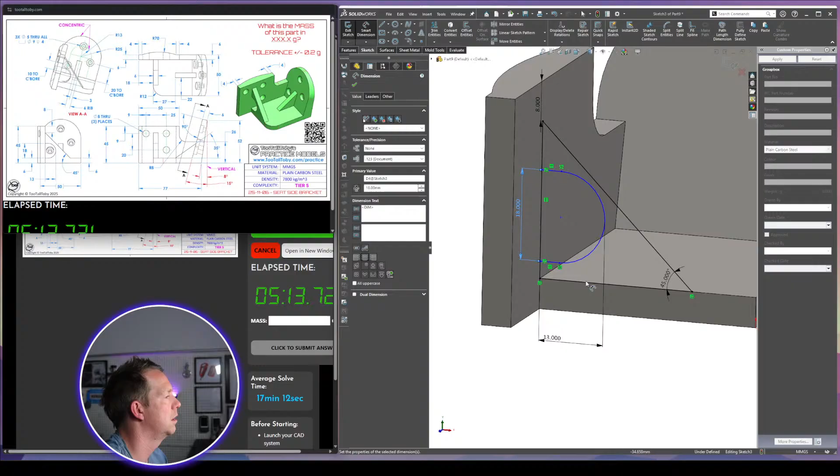That's 13, for instance. This here is 45. This comes up to 8 from this edge. This part here is 18. Slot actually drops all the way down, so I'm just going to drop it there. And the width of this section is 6.

Okay, another detail done, radius is 12 here. Back on the front plane, I want to put this rib in.

I'm going to sketch the whole thing because I need to do an offset face for this one. I can see it's a 22mm offset, just working out how far back it needs to go, because I can't see a starting point for it. I know it's somewhere below this edge.

It looks like it's in line with that hole, but this is a guess, so it might be wrong. I'm also going to guess it's 6. Offset 22.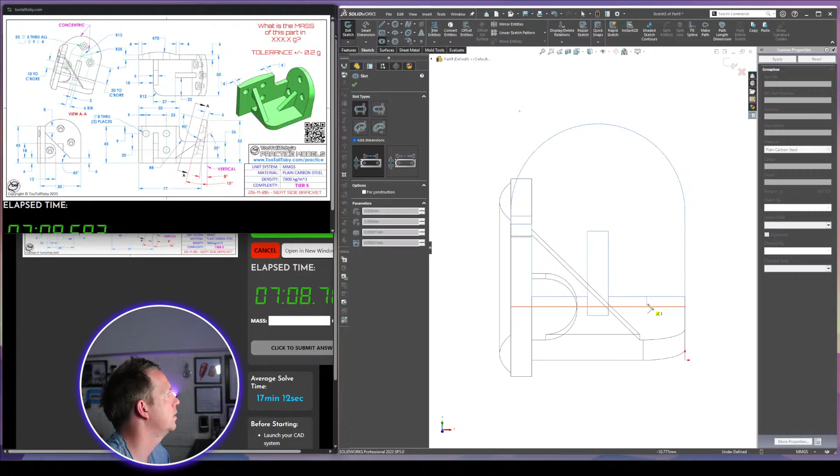Right, now we've got a bunch of holes to do. This one has an interesting type, like a slot profile that we kind of want to draw, which if I can do, I will, because it might help things. Make that all for construction.

The width of the slot, 13. 26. Yeah, so put that one there.

And then I'm going to use that sketch to do a hole wizard. Is it going to let me? No. Position on the face, type.

Put in the numbers, so 5 by 9 by 4 in these positions. So 1 going to be here, 1 here, 1 here. Now I can dimension them. 20 to this one, and 10 to this one, and accept. Those holes are done.

And then I've got 3 more holes to do on this face, and then I think the model is done. We've got 8, 8.

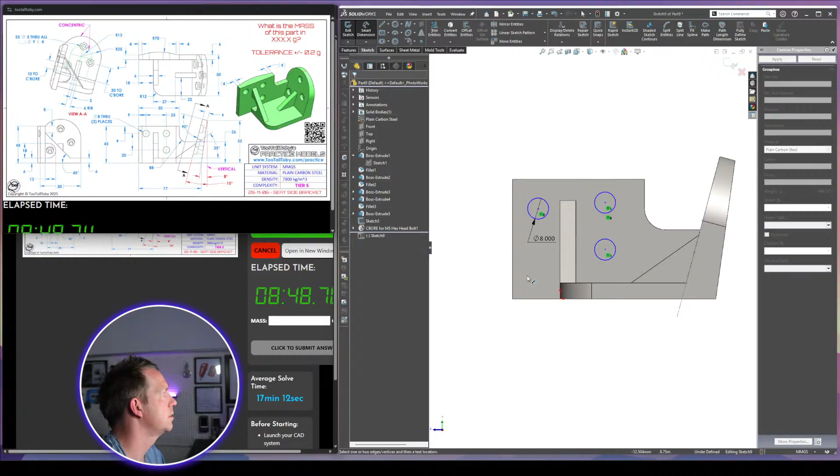Select all 3, make them equal, and dimensions 25. 9. 9 those horizontal, and then 20, the last one.

Cut through all. All right, now a quick sweep just to have a look, see if we got all the detail. I think we do. So the answer would be 439.5.

We are correct, which is pleasing because that was a very tricky one. As I thought, starting this model, no symmetry, a lot of tricky angles, so I had to take special care to read the dimensions accurately. Make sure you're putting in the correct dimensions in the right places.

Seat side bracket. But very, very neat model. Good practice, good challenge. Thank you, Toby.

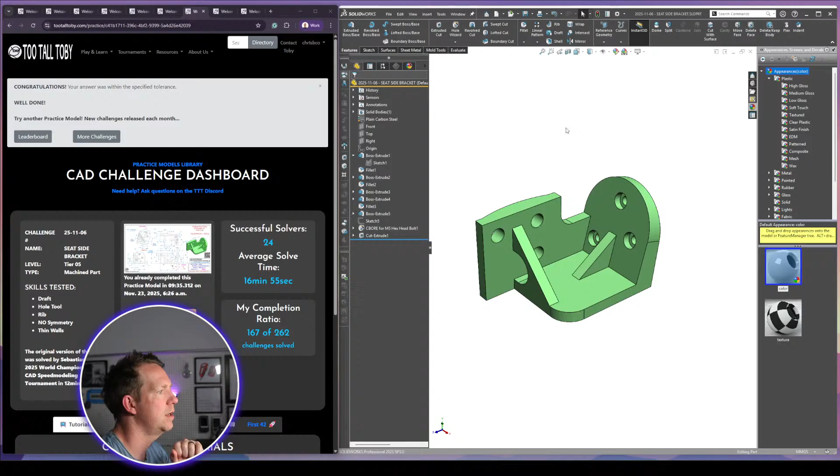Hello to anyone out there. We're going to do this tier 6 model. I'll give you the chance to have a go with me. So again, another one from the tournament.

Oh man. With the right kind of... like I'm very certain there's an efficient use of a variable feature pattern, which could make this work well, I think. But yeah, there's a few ways of doing it.

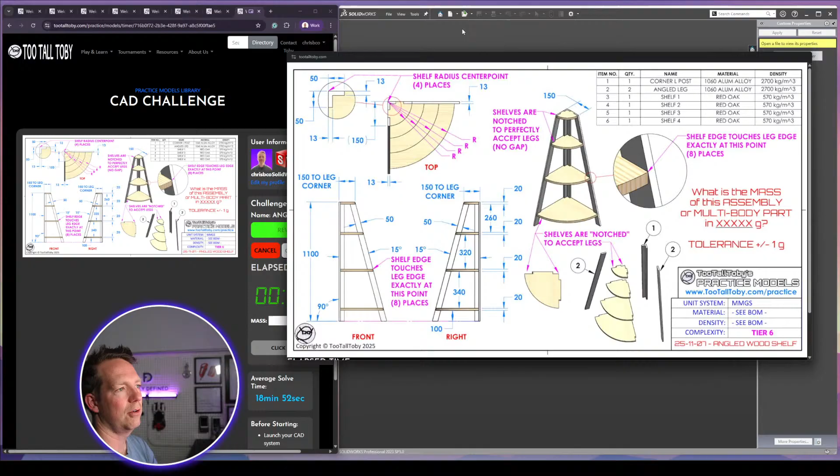Yeah, all right, so let me reposition and we'll start. This is a millimeters aluminium alloy file. Millimeters aluminium alloy. And I'm going to close and restart.

3, 2, 1. Here we go. Where am I going to start? I'm going to start with the straight parts, or at least the one that we can see that's in the corner. And I'll also do just the largest radius, which is... what does it even say?

I'm looking at the gaps. Shelves are notched. Shelf radius center point. Does it not tell you the radiuses? Yeah. That's cool, no problem, so you got to work it out.

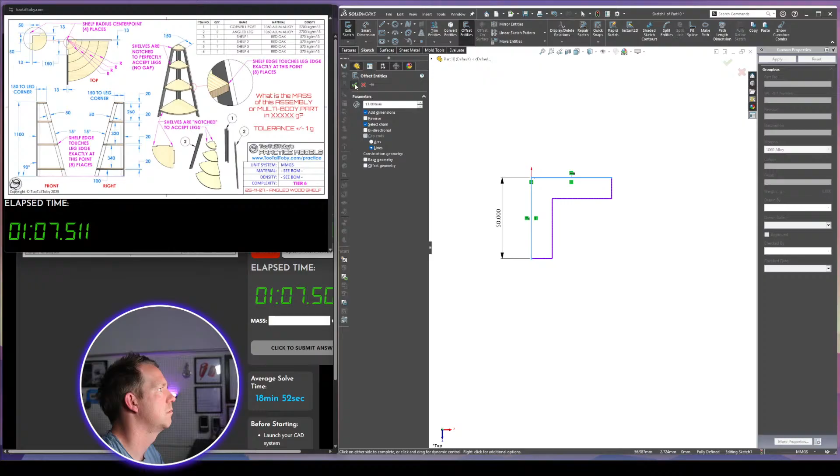All right, so let's do this bit first because we've already got it open, 50 by 50. Close that, offset 13, cap ends, lines, extrude, full height 1100. Okay, that's the first bit done.

Next part, they have this straight section which comes all the way down. Shelf edges, touch, and now I'm looking at the pink notes. The pink notes are going to tell you quite a bit. The whole idea for this is to do all the bodies and just indent them at the end to cut away the material.

And could you mirror? Could you do half and then mirror? Yeah, probably could as well. Shelves notched perfectly to accept the legs. Shelf edge touches leg edge exactly. All right, so I think we've got to do that side view.

So I'm going to do this view here, whatever this is, right plane. And I'm just going to come right out here and sketch what I can see. 15 degrees is the angle. I think this is where you probably should have started the model. Now it's 150 to here, and this is what sets out the diameters for all the parts. So this sketch is actually going to give you most of what you need.

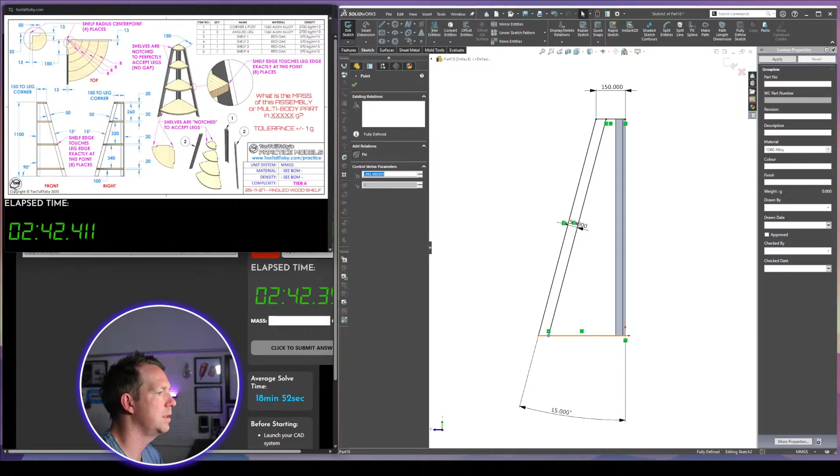I'm offsetting that one. I'm going to drop that up there, and this one down here, and then I'm going to do my shelves. So each shelf is 20, they're 100 apart, and they stop on the top corner like that.

20, 100 from the bottom, and then we've got a couple more. So I'm going to draw it like this. 1, 3, and then there's one right at the top.

Okay, and now each of those, they're all 20, so all those are going to be equal. And then we're putting the gaps in. 340, 320. All right, now it's fully defined. Now we just need to make it.

Now this first one, I'm actually going to do like leave that sketch and do another sketch because I think it might be quicker.

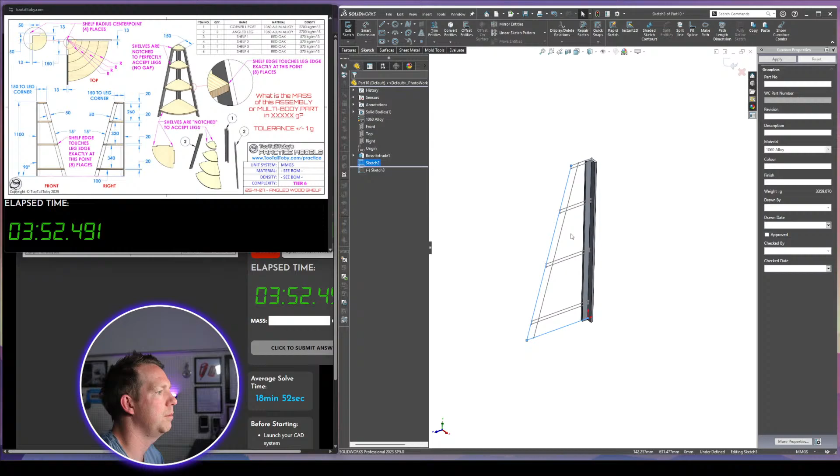To do it this way - let's see if I'm right or not. So I put that second body in. Now I want to do my revolves.

I'm actually going to do another right plane, convert everything here, delete this, and if there was another line at the top, I'd delete that. I'm going to revolve everything, not thin feature, I'm only going to revolve it 90.

I'm going to use this axis - no, like that, axis is going to be this. Contours like this, 1, 2, 3, 4. Uncheck merge. Okay, I'm going to do a...

Can I do a plane that will be between those? Yep, I'm going to use that plane to do a mirror of this body. Then I'm going to do... how could I do this quickly?

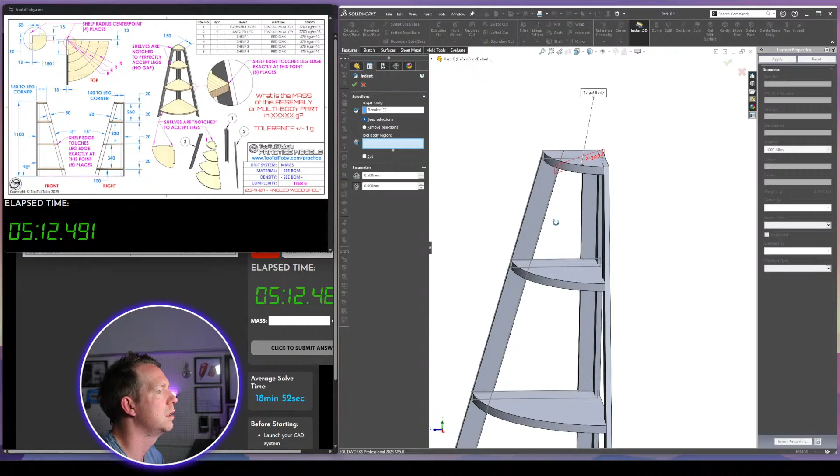Target body is this, and I want to remove this and this. Cut it. Oh, and this one. Cut. So I have to repeat that process 3 times, but I think that's easy.

Target body, tool body, 1, 2, 3, done. Target body, tool body, 1, 2, 3, done. And indent again, target body, cut, tool body, 1, 2, 3, done. Right, that should be all the cutting done.

Now we've got 1, 2, 3 parts which are aluminium alloy, 4 bits which are red oak, if we've done it right, this is the right answer, 10320. 10320. No, we are wrong. 10320, okay.

So somewhere in our detail we're off. And I wonder if it is to do with the legs or the way that we've done the pattern.

Shelf radius center point - the tricky one. Let's just save it before we lose anything. Angled wood shelf, our time, pretty reasonable, 6 minutes. But something's going wrong, so work that out.

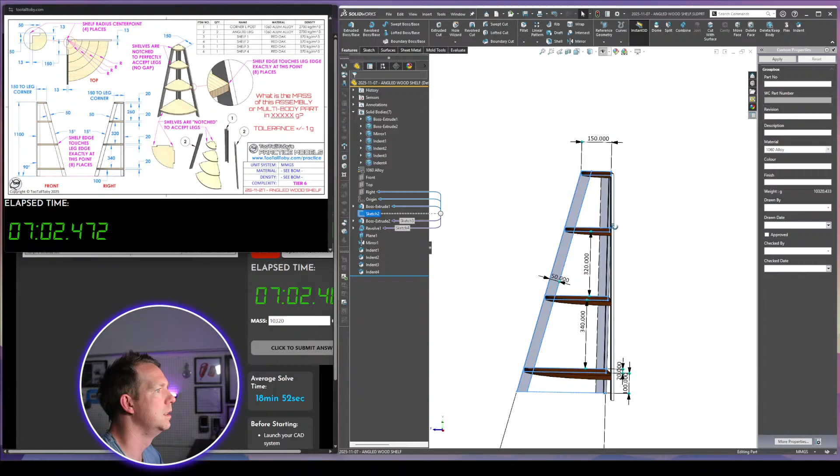260, let's just check some of our sketches. So we've got 13 for the edges. Got 150 to the leg corner.

I think that's going to be right. Got 50 for that thickness. Got 20, 20, 20 for each of the shelves. 100, 340, 320.

We've got 1100 for the total height. We've done the notches correctly. Looks like it. If we isolate these bodies, each of them have the required notches at angles.

1, 0, 3, 2, 1, 0, 3. Yep, we've got correct materials - red oak. Got the shelves touching the right point.

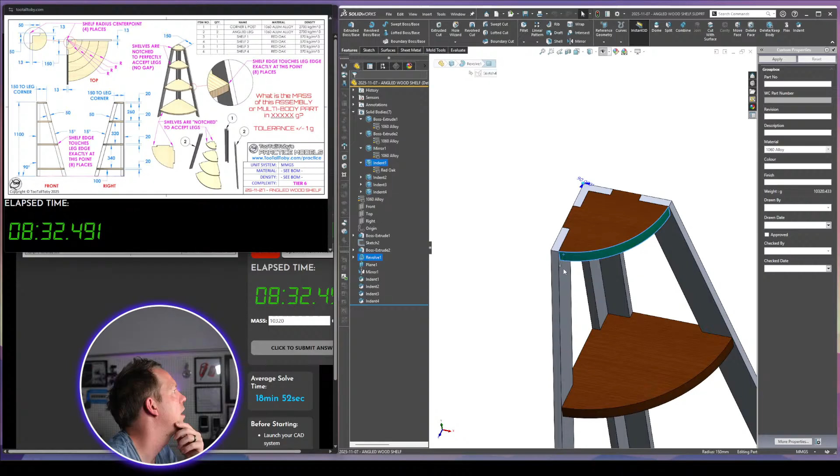And 150 to the leg. I'm a bit stumped on this one. Looks like everything is right from a dimension point of view. But we are not within tolerance, and something is amiss.

If I was to check all the dimensions off, they look correct. I think the indent process was pretty quick.

What do you think, guys? Where have we gone wrong on this one? Let's screenshot.

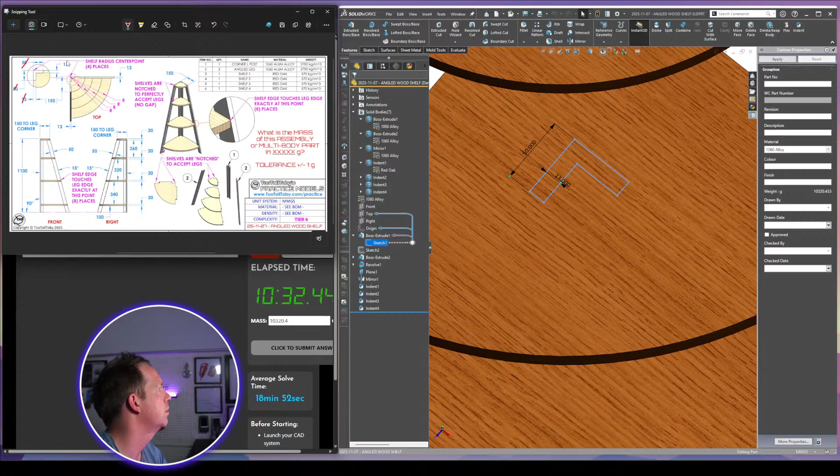Okay, so first sketch - 50s at 13, and then 1100. Second sketch. 15-degree angle, where's the 15? Yeah.

We have 100, 20, 340, 320. They're all 20s, and then we have the 260. We have the 50. We have 150 at the corner of the leg. We have 13 on the sides.

Shelf radius center point. I think we did the revolve in the correct space - it's all revolving around that edge at the back. Our revolve contours look okay. It's using all the material. Yep.

Is our material correct? Just checking the density - 570, yeah. And aluminium alloy, I think that is also correct - 2700, yep. All right, so I'm unsure where we've gone wrong on this.

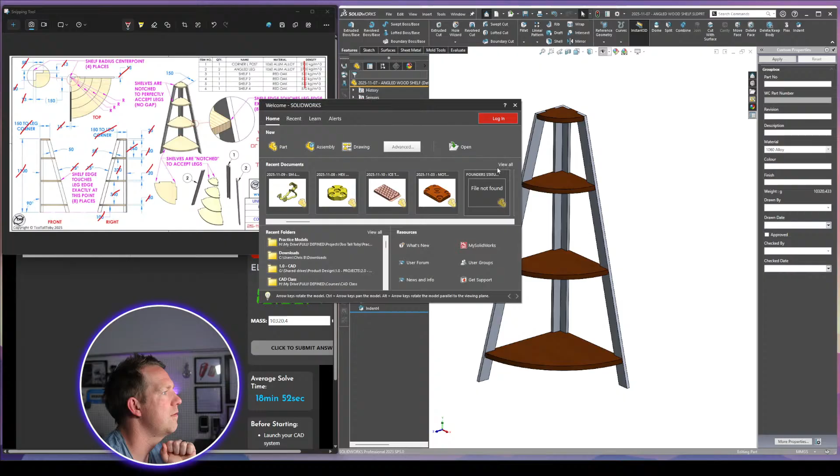We did 6 models - 1, 2, 3, 4, 5, 6, 7 or 8 models. Tier 4, Tier 5, Tier 6, and a Tier 7. That was a lot of fun.

Can't submit this one, don't have the right answer. We'll have to look it up.